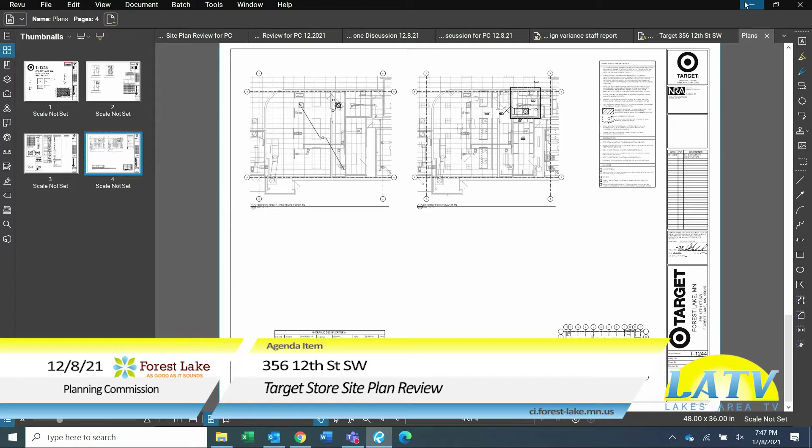Target is requesting a site plan amendment to allow additional curbside pickup parking spaces. The site currently only has 8 curbside pickup parking stalls. The new layout of the parking lot would reduce the total parking by 6 spaces, just because of the spacing of the access aisles within the new layout, for a total of 624 parking spaces. The applicant is also requesting the allowance of 12 signs designating parking space numbers to indicate pickup parking stalls, also a curbside pickup beacon and a new crosswalk from the store to the new curbside pickup parking stalls. No other site improvements or exterior building expansion are proposed in this site plan amendment.

I will briefly discuss some of the items - feel free to stop me if you have any questions. For the setbacks, lot size, and building placement, the proposed site plan amendment doesn't alter the setbacks, lot size, or building placement, and it was part of a site plan approved in 1999.

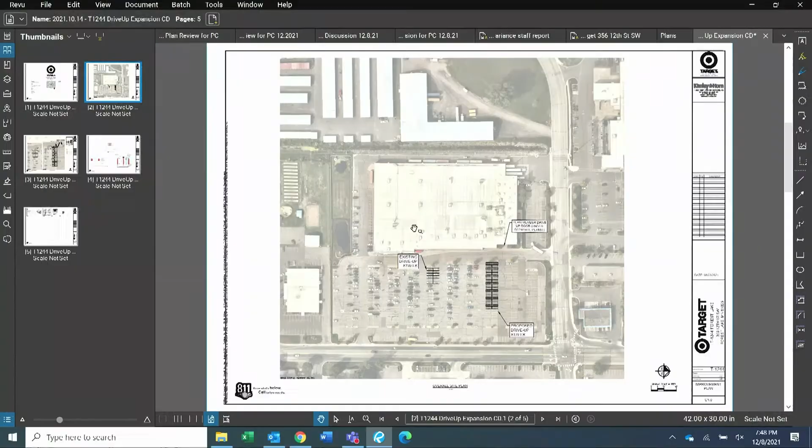Regarding signage, jumping down to the bottom, a provision in the zoning ordinance allows for signage in parking areas when necessary for orderly operation of traffic movement. So in this case, that signage is going to indicate where those pickup parking stalls are for customers to easily find them. The site plan amendment does not alter the trash enclosure, the lighting regulations, or the landscaping regulations for the site, so we're really just looking at that additional curbside pickup and that signage.

The recommendation is the Planning Commission should review the proposed curbside pickup parking stalls with the accompanying signage. If the Planning Commission finds the request conforms to city standards, the Planning Commission should motion to recommend the site plan to the City Council for approval, subject to the conditions listed on the staff report.

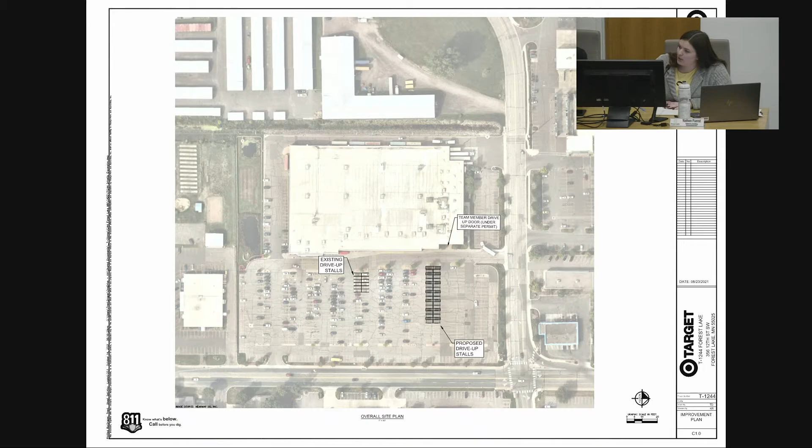And I'd be happy to answer questions. Any questions for city staff?

Mike? Every time I look at this, I see that the crosswalk for people coming out of the Target store has a 45-degree angle coming to the middle of the parking lot. Wouldn't it be easier to make that crosswalk straight across and move all that parking north one section? Now you've got a straight shot, everything's in line. It's just my personal view of this.

Then you don't have crosswalks going from one side of the parking lot all the way to the other side to another system. It just seems kind of weird. I think they're trying to preserve the straight shot for customers and making the angled shot for their staff.

But there's still a whole other row of parking, another double row to the north. That's just a crosswalk - if they moved all those stalls north one section, to me it makes common sense that it's just a straight shot. Everybody's there, you can drive in and out on both sides. A lot of parking for the employees, but it's just a personal thing. I noticed that, and it just doesn't - you go to most stores, it's a straightaway shot for all the pedestrians. You're not going at a 45-degree angle for the handicap and pedestrians, that's all.

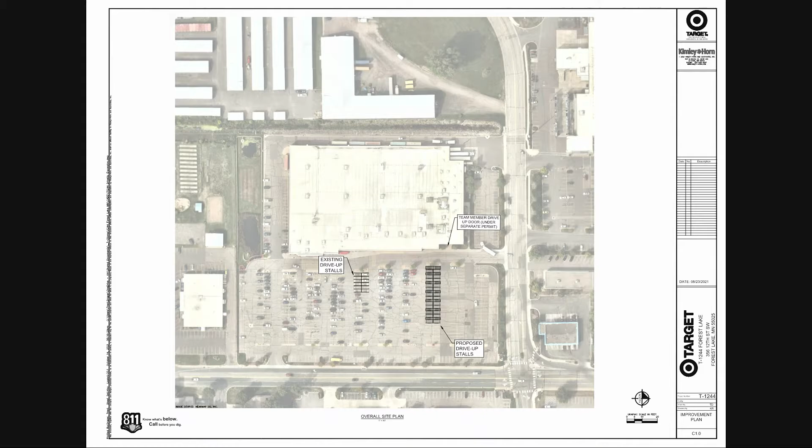Okay, I get that, but I'm just not seeing where it - well, we can talk about this later. He's saying there's going to be more congestion, it takes it too close to the street, that divide between Walmart and Target, and people stacking space. But the stop signs, if you look at this one here, these stop signs would stay in the same place. You'd straighten out that parking, and here's your delivery. Oh, you're saying because people are going to have to stop anyway for that crossing? Yeah, so here's your crosswalk, only straight up and down. I mean, it's a minor thing, just something I noticed. I hear what you're saying now. It has to do with angles and numbers, yeah.

Other questions for the city? Is the applicant here? We don't know that the applicant is here in person. I don't know if they RSVP'd online either. I don't believe so - Dan, would you know?

They didn't let us know if they were interested in participating, so we can't really speak to the circulation, the vehicle circulation on site. But if there's any other questions.

Any other questions, comments? If none, chair is looking for a motion to approve, deny, or table. Ms. Young? Mr. Chair, I would move approval of the site plan amendment. Second. I have a motion and a second. Any discussion on the motion?

Any discussion? Hearing none, all those in favor signify by saying aye. Aye. Opposed? Abstentions? Motion carries unanimously.

Next on the agenda is number 8, DigniCare. It's a memory care project, also a site plan review. Nathan, I believe you're taking us through this? Yes, that's me. Thank you, Chair. Good evening, members of the Planning Commission.

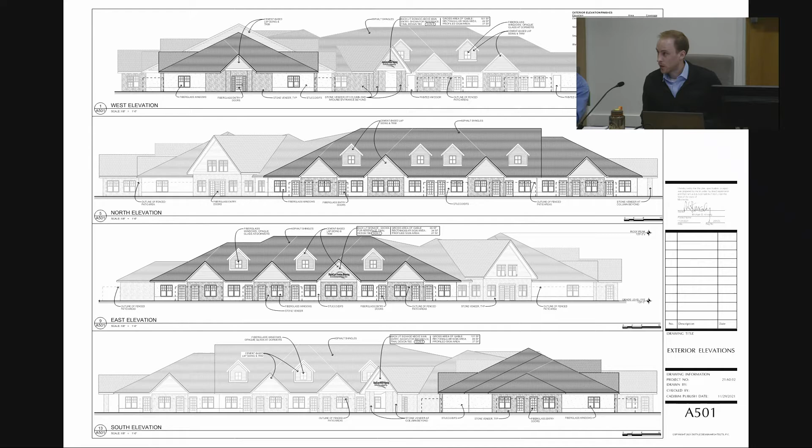There are a number of considerations the Planning Commission has. Staff have reviewed the site plan requirements and do support approval contingent upon the criteria, or the conditions listed in the staff report. The applicant is here; if you have any questions for me, I'm happy to take those at this time. I guess we do. Susan?

I'm having trouble figuring out how this is oriented on the site. To the northwest, that's where that big apartment building is going in, correct? The Common Bond apartments. Yes, so there's apartments going in north and west of the site. That's correct. So the site's got kind of a home plate sort of shape to it.

Is the driveway and the wings of the building pointed toward the point of home plate, or is it pointed toward the apartment building? So you're talking about this traffic circle? Yeah, does that point toward the apartment building? It points toward Headwaters Boulevard. Pardon me? It'll point towards Headwaters Boulevard. It faces south, toward Headwaters Boulevard. Yeah, okay. Headwaters. Okay.

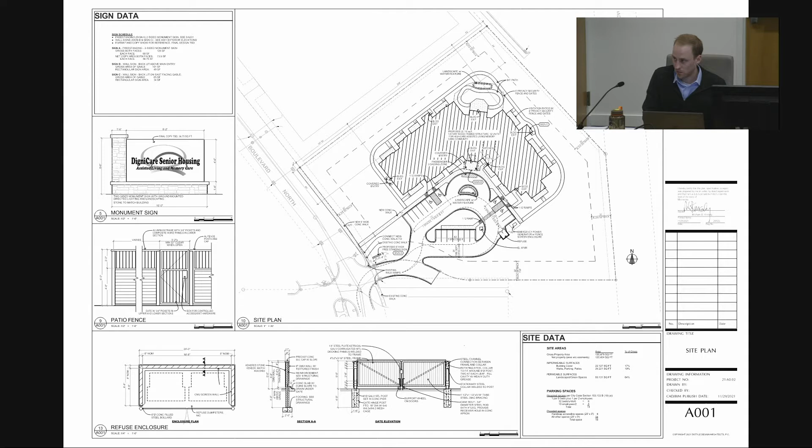True north is straight up on the drawing. So even though everything about the site is skewed, north is still straight up.

Somebody else had their hand up down here. Mike?

What was the pump you were talking about with Public Works? I called it a grinder pump. It's a grinder for the sewer. Okay, yes, for the sewer. Okay, I understand, I know exactly what that is, without going into further detail. I missed the grinder part.

Nathan, could you refresh me please on how we determine the parking requirement? Because I guess if there are 8 staff persons there at any one time, that would be 8 stalls, and then we assume that only 3 people ever get visited at one time, like on Mother's Day or the day before Christmas, or? Yeah, so we use the standards provided for nursing homes, sanitariums, and similar uses. So that's just what we're reviewing against. The applicant, I believe, is suggesting the number of stalls they believe they need. I would refer you to ask them that specific question.

So what's the required parking based on? Or what did you use for your required parking? 11 stalls are required per review. Thank you, I was wondering what the criteria was. It's nursing homes and similar facilities. So we're using a similar type of use. But is it based on staff? No, this is provided in city code parking requirements. So we took the requirement from city code parking requirements.

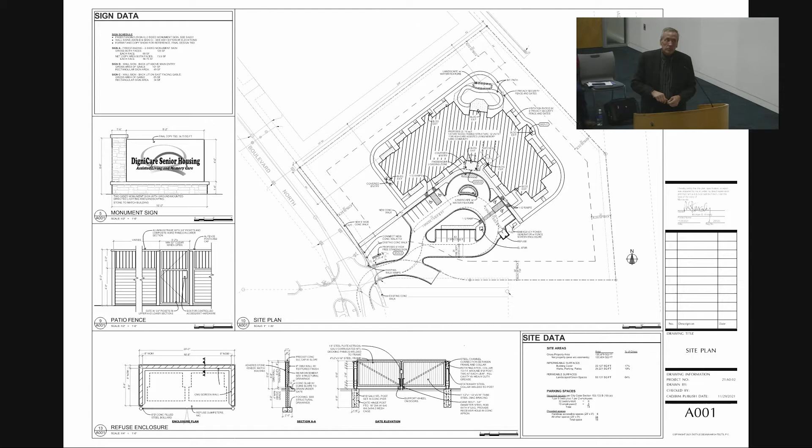A building this size, how many employees are on staff, what's the most employees on staff at one time? The best ratio would be during the heaviest part of the day. Lunch is usually the heaviest part of the day. I would say 8 to 10, because I was looking at the parking.

The parking, the way it's laid out, comes from building after building of history. And if we needed more parking, it's not like we don't have room. So that's just using historicals.

Other questions to the applicant? Geneva: Is the eventual clients all privately paid, or is there gonna be a portion that might go to citizens who are on Medicaid? We always have about 20% that we set aside for Medicaid, and people think we're nuts, to be honest with you, because we probably are.

If you don't know, I'll tell you. Most of the big places won't take Medicaid, and we tend to look at it a little differently, because some of the best referral sources are those county case managers in the hospitals. And once they know that we're the go-to guys for high acuity, well, turns out we take CADI waivers, TBI waivers, the CAC waivers, because we're the go-to guys for those high acuity people.

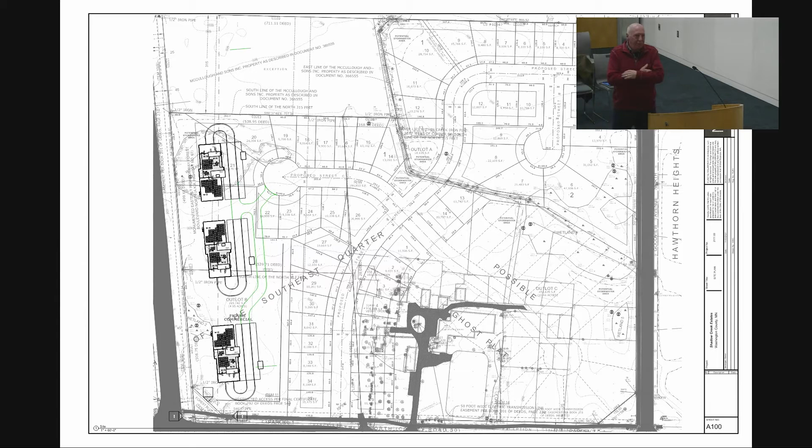We're really looking at 2 apartment buildings, so that one you see on the north there - one of my plans had slid that further south building, kind of angled it, and then dropped the other one down a little bit, and that cul-de-sac stayed up there on the north for the most part. A lot of ponding up there, a lot of ponding along the highway, just a lot of ponding, period. And once we get into the hydraulics of that, that'll kind of dictate what we can and can't do too.

Susan? When you come back to us, I just want to make sure that this flows so that folks can get in and out of here. Realizing the number of people, think about 6:30, 7 o'clock in the morning getting folks out of here, trying to get emergency vehicles through curves and cul-de-sacs. In your high density, in your apartment areas, just make sure you've got good access in here.

Yeah, and more than one little way in. Yeah, and that same little way out. And that is already a challenging intersection at 202nd and 61. And it would not be good to make that any more challenging, with additional entrances.

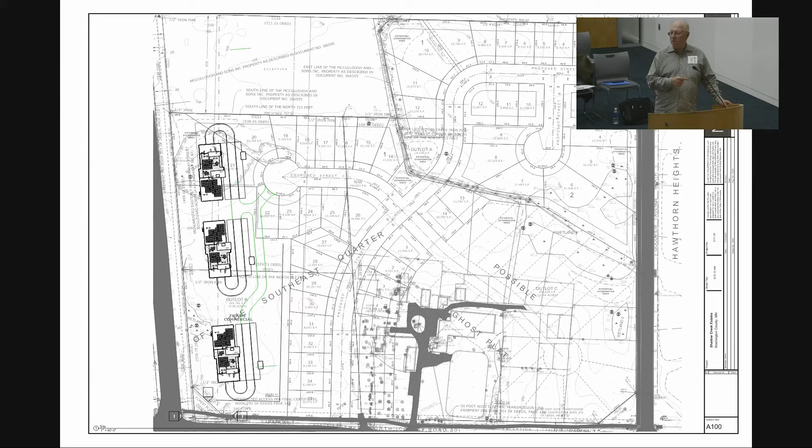Okay, so are you telling me that the eastern piece is 10 to 15 and the western piece is 15 to 20? Yes. So that's not what we were saying. We were saying 10 to 15 on the west.

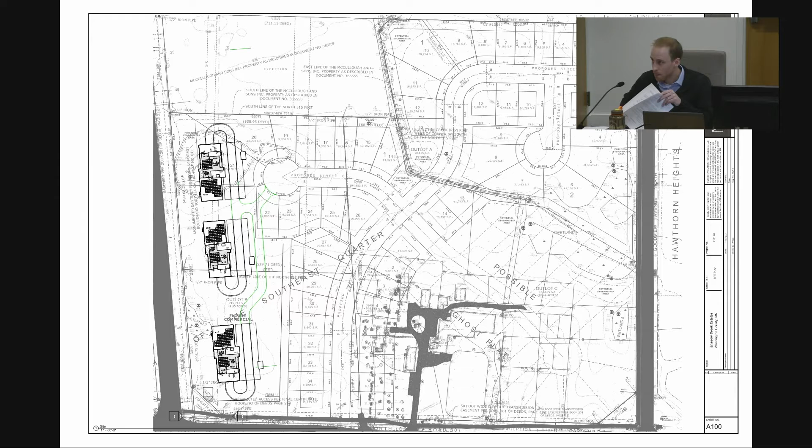But if you look at this property and think you can bring a better, more saleable product, as Mr. Moore knows, it can be rezoned. You can ask for a rezoning. Those things are possible, but we know that you have a desire to get the best return on your investment. Our comp plan says more apartment buildings. I think folks on the planning commission have heard that there's a community desire to not have quite as many as in the comp plan. But, you know, it's kind of what do you want to do with the property, but then it has to be a good product.

And my concerns right now with the way you've got your apartments is if you try and do the apartments and the single family, I'm concerned about your flow through and safety.

We are not a large, highly experienced developer. I used to be a real estate lawyer. Since I've retired, I've done a fair amount of development, mostly smaller projects, 30-some lots over in Centerville, 30-some lots in Chisago. I did a 14-lot villa home project in Minnetonka, a 13-lot villa home project in another western suburb. Over the years I've done some smaller projects, I don't do big ones. This would be the biggest one I've done.

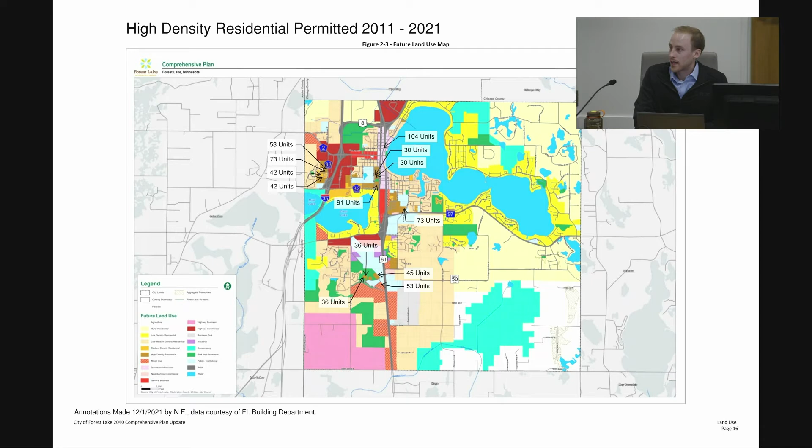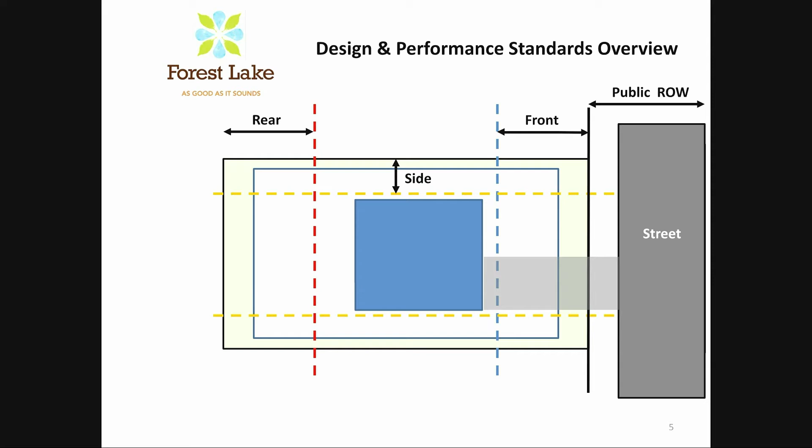Just in trying to think about these standards, I wanted to make sure we're all crystal clear on what we're talking about here. I know the Planning Commission is quite experienced with these, but I did want to briefly touch on this. This is kind of what you would consider to be a standard lot, quote unquote, because there's not many standard lots — there's a lot of things going on out there in the world. But anyways, you can see here you've got the public right-of-way, the street, and often included in the right-of-way a distance beyond the curb that's in the public right-of-way. In some cases it's utilized for road expansions; it's there for the public benefit. That's where the property line starts, where you can see the cursor is.

From the edge of the public right-of-way to this blue line on the screen, this would be considered your front yard setback. The yellow dotted lines from the side property boundaries indicate the side yard setback, which runs into the property, and the red line indicates the rear yard setback.

In the MXR1 zoning district, the side yard setbacks are 10 feet. The front and rear setbacks are 30 feet. There's also a lot area requirement of 15,000 square feet, which would apply to all property boundaries.

You can see this property shaded in a green-gray color, depicting more or less standard easements. Drainage and utility easements are required on platted lots to ensure drainage over the entire landscape works, and in the front yard, utilities use the drainage and utility easement for provision of services. These are all the things we're considering with these standards.

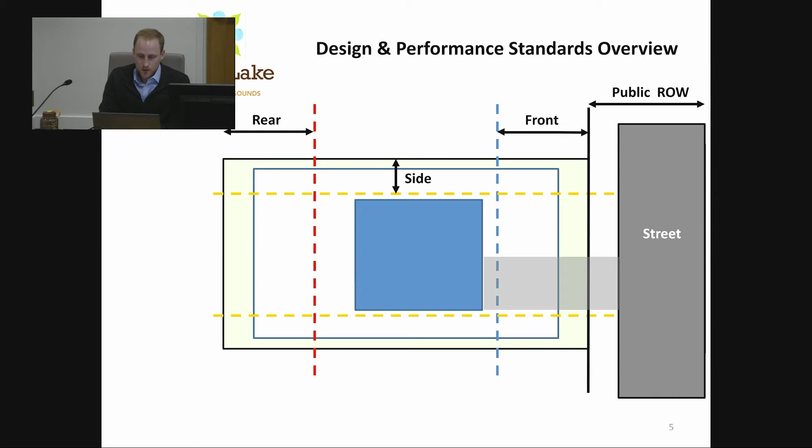Here on the slide and in the staff report are the existing lot standards. One of the questions brought up during the previous agenda item was, what is detached townhomes?

What does it mean when it says HOA? Detached townhomes in this context—and this is a nebulous term right now in development—mean a smaller lot. They don't necessarily mean a specific type or style of house. It's the size of the lot and the standards that come with it.

Where you see an indication of no lot area requirement if there's an HOA, that's an abridged paraphrasing of what the requirement actually says: if there's common ownership of a large area with building pads, a minimum lot area is sort of moot. So there's no requirement, because we're assuming you're over a certain acceptable amount.

All they're essentially buying is the pad that the house is on, correct? Yes, that's correct.

In the staff report and on this slide, staff are proposing, for the basis of discussion, something to consider in terms of amending this zoning district. Staff sat down as a team with various members and worked through what these changes might mean. The main change here is to lot width and lot area. Those two standards, if changed, would bring this district more into alignment with the future land use that accompanies it.

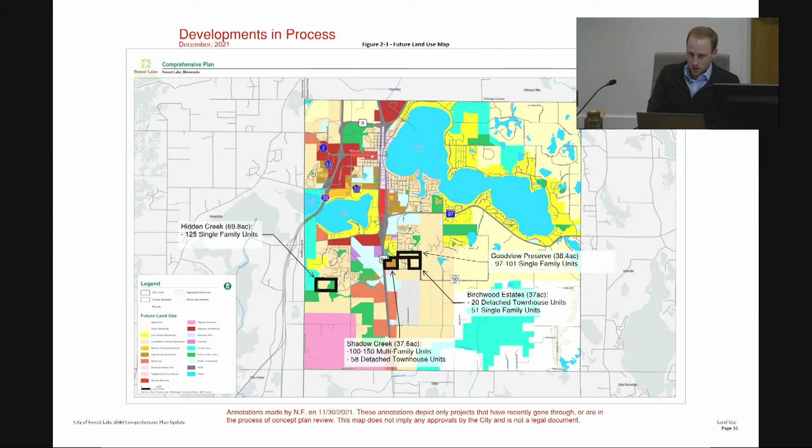Nathan, before you go further, what's the difference between a single-family home and a detached townhome? A single-family home is on a single-family lot as opposed to a detached townhome lot—it's primarily a distinction in size. No, the actual building that's built on the lot. Are they one and the same? Yeah, a detached townhome is essentially a single-family home. An attached townhome would be different—this is detached townhome versus a single-family lot.

Why would we want that? I guess just to shrink the lot size? Right, that's the idea. There's a requirement to have at least a 60-40 split between larger single-family lots and the smaller detached townhome lots. The intent is to provide a variety of lot sizes, you could say a variety of styles too.

And most of those detached townhomes do have an HOA? Yeah. Because you're not allowed to do this or that, or you can't change anything. Yeah, something developers are doing a lot, since there's a big market for folks to downsize, and developers use an HOA to manage common areas and things like that.

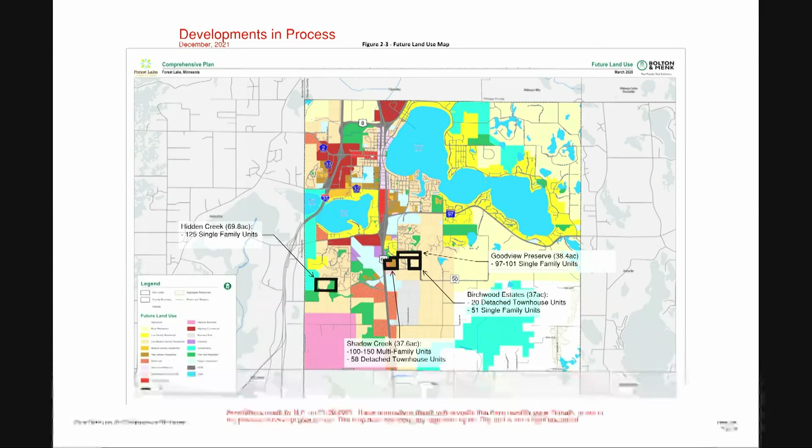So that's what I had prepared for you in terms of information. I'm going to bring it back to this slide here, just for the purpose of discussion and questions.

Did I see in the materials I looked over this weekend that MXR is about 60% of our developable area? So whatever we decide will be our MXR standard, that's going to be the vast bulk of our development.

This is what Forest Lake will look like in the future. So as we think about it, what do we want our community to look like? What do our existing residents want the community they bought into, that they thought they were getting, to be? And how do we set ourselves apart—either just like everybody else, or as a unique community?

Because whatever we decide here, we've got a little commercial, maybe 10 or 15% commercial, and a lot of apartment areas. But the majority of almost all of our residential, if it's not an apartment, is going to be this. So I want to make sure that as we think about these standards, we consider what that kind of density is going to mean for the services this community has to provide. That's a big consideration for police services, fire services, plowing—it's pretty clear, you get more density, more people, more demand, more impact on roads and parks and everything.